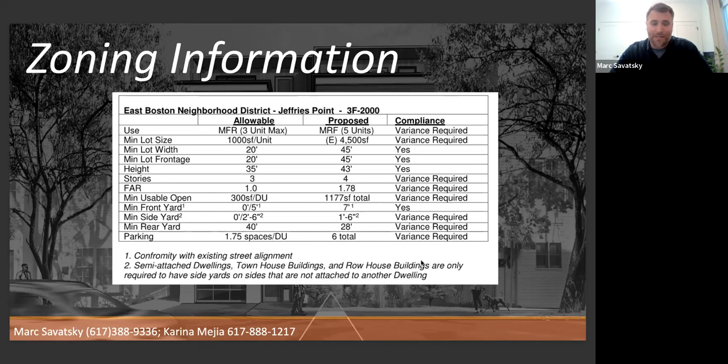Next slide, please. I'll walk you through the orientation of the building, the design. I think really highly of Chris and Zephyr. I think they put together a really nice, detailed building that flows, that works. There's a lot of small things here that I'll try to point out if I can use view options and annotate.

It was very astutely pointed out to us on our last O&S meeting. We flipped the driveway because our civil engineer suggested it may make for a slightly easier grading plan, given the way the contours of the site exist. It's not a big deal. After we learned of the fire hydrant and studied this with our transportation engineers as far as its impact on parking, we said forget about it. We flipped the driveway back to where you were accustomed to seeing it. We're going to keep the curb cut exactly where it is, so the parking on street as it currently is will be how the parking remains once this building is complete. There will be no impact, and we appreciate that comment and hear you loud and clear on that.

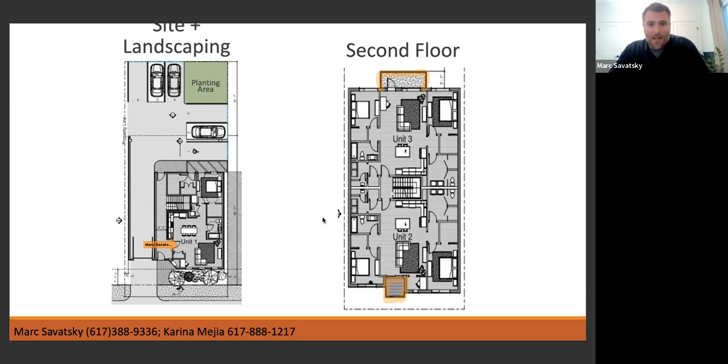As we get to Units 4 and 5, you'll notice these are duplex levels, bi-level condominiums, which I'll pause and emphasize. These are for home ownership. These will be condominiums and not apartments.

As for sale product, there's a few things the development group has taken into consideration. One is a professional management group. I think when you have a 2-unit or 3-unit building, you can self-manage, but at 5 units you start to get a lot of 'I'm not doing it if he didn't do it, and he never took the trash in, so I'm not going to do it.' For that reason, we work with a group called Urban Management, and they'll be responsible for janitorial services, taking the trash out and pulling it back in, snow removal in the winter, and upkeep of the planting areas in the front and back.

Going back to the unit floor plans, there's open concept living, dining, and kitchen on this 3rd floor. There is 1 bedroom on this level, which we think may be used as a home office. These are nice because they offer 3 bedrooms as you go up to that reduced step-back 4th story.

You get 2 additional bedrooms there, and our hope is that they're suitable for families and folks who may want to stay in the neighborhood more long-term. That's something we also know is important, so we're happy to offer these 3-bed units. Highlighted here is that outdoor space with the glass railing, which you'll see shortly. Off the rear is another deck for Unit 5, given that there's no longer a roof deck.

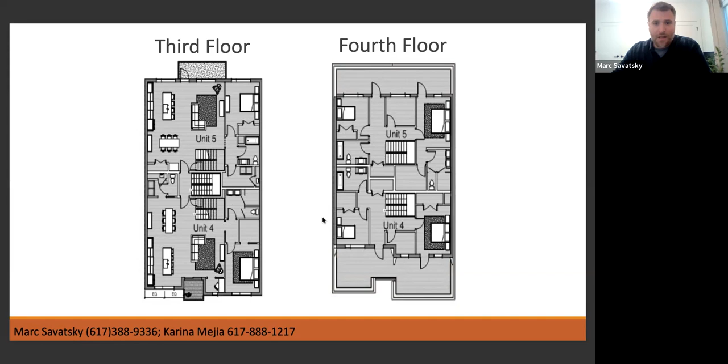Solar study. This study to the right here was done by Zephyr, and I appreciate the detail and thoroughness of these studies, though I don't always follow them precisely. This is a $10 app I use from my iPhone, which I really use every time I look at a property. I think it tells the story nicely of where the sun starts at 7 a.m. and where it wraps around at sunset at 6 p.m., giving an idea of where a building may or may not cast shadows.

Looking at this in more detailed fashion, I think what's really important to note is that this building has very de minimis impact on shadows to our adjacent structures to the left or right, especially after 10 a.m. There's a very marginal reduction in those early morning hours, but as the sun moves on, the impact on shadows is again fairly negligible.

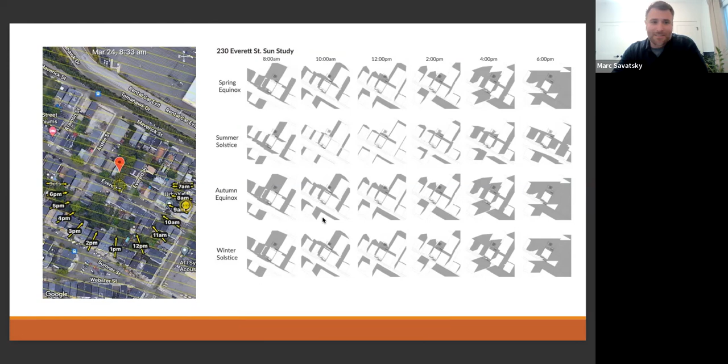This is our first rendering—this is an updated rendering, rather. I'll point out again, the curb cut has been mirrored, so the driveway would be on the right in this photo.

I think it's important to point out the materiality and the quality of the design here. What we've seen a lot of is fairly uninspired designs, and I know beauty is in the eye of the beholder—some may not appreciate the more transitional nature of this design, but I happen to think it's handsome. We use a Cembrit panel instead of your typical Hardie plank planks, so these offer a little bit of additional detail.

We introduced this product, would be a Nichiha. It's there to resemble cedar, perhaps a little more durable, and that theme carries through cohesively up to the penthouse. We introduced brick at the ground level because we think that's a very strong base or anchor to the building—a resilient and durable base, especially in an area we're trying to build with an eye toward the future and flood considerations.

There's no basement in this building—that may not have been explicit, but it's obvious from our floor plans. We're working hard to hold everything above the base flood elevation in this area. All of our critical infrastructure, heat pumps, electrical panels, all that gear, would be elevated off the street and centrally located on the roof, so it's not visible and not prone to future climate change concerns.

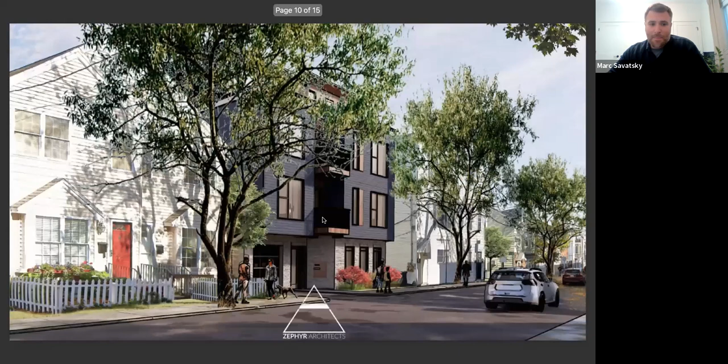This next rendering gives some context of the building on the block. One thing I've pointed out before is the eclectic nature of the houses up and down Everett Street. There's a strong argument a building on Webster Street might want to be brick, like the many brick bow front buildings there. Whereas here we have gable roofs, flat roofs, some more tenement-style old three families—there isn't one cohesive singular architectural style. Joy Street Design did a cool, more modern building about six houses down, so we think this will be a great addition to the block and neighborhood.

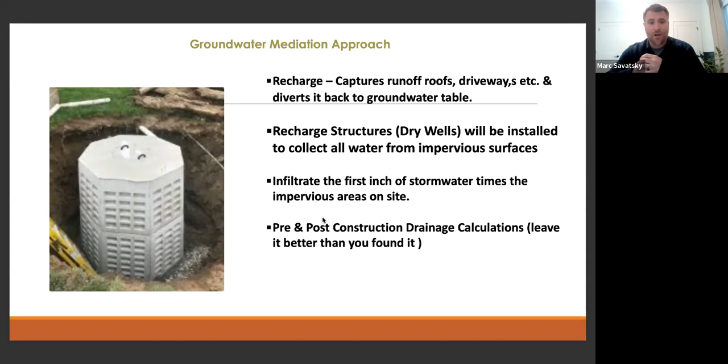Our final grading is like a soup bowl, in a less dramatic fashion. The idea is that water hits our site and doesn't run onto any adjacent sites—it comes back and falls into three catch basins located in that rear parking area, and all those catch basins go to the groundwater recharge infiltration system. Next slide, please.

Construction management plan—I won't spend a lot of time here, but the idea is that building in the city is a big responsibility. There's a lot of people, a lot of stuff going on, and we take that responsibility seriously.

Communication is something this group is committed to—I've spoken to a lot of neighbors about it. We've talked about a Facebook group, a way to let neighbors know if, say, there's a concrete placement on a Tuesday, so they're aware a pump truck may be setting up at 8 a.m. that day. If anyone has other ideas for community outreach and that type of communication, we're open to suggestions. Next slide, please.

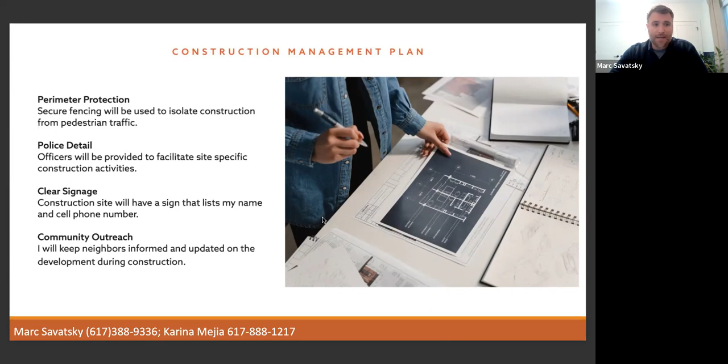I'm not going to avow that we're perfect, but we do try. For rodent control, we work with a professional group called Waltham Services, who will set up bait stations approximately 6 weeks prior to construction, prior to demolition. They'll check on those on a bi-weekly basis and refill the baits and make sure they haven't been destroyed, lost, etc. Next slide, please.

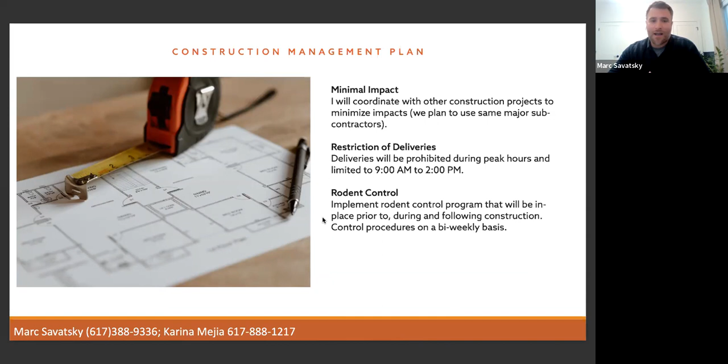Sustainability goals—I'm happy to go into this further. It's somewhat technical, but Stretch Energy Code mandates that we perform a certain degree better than the base building code, so we're committed to that. I think the stormwater drainage, which we talked about earlier, is another feature of this site. I like to say we're kind of like the Boy Scouts of America—we want to leave this better than we found it.

Next slide, please. That sort of concludes the presentation. I appreciate everybody's time and attention, and we're happy to take any feedback or answer any questions.

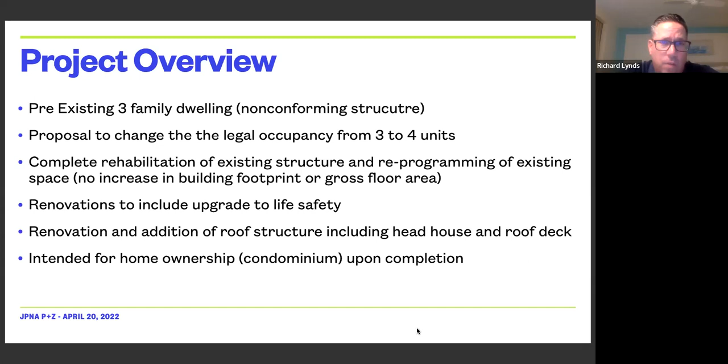So our zoning district, 3F2000, is the designation that the Boston Planning and Development Agency and the Zoning Commission put forth back in 1993. As everybody knows, we're going through Plan East Boston, which will be a rezoning of the entire neighborhood. I'm not sure what the rezoning will look like for this particular neighborhood, but one of the reasons I include this is because we have an illustration.

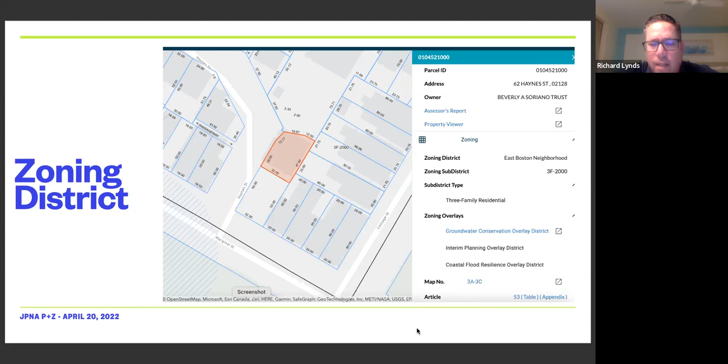If you see those blue hash lines closer to the bottom of the screen, that's the flood zone. Although we're not currently in the flood zone, we're relatively close, and that's one of the reasons why we're proposing these changes. They all pretty much deal with the existing floor space, not any additional space. We're not proposing any additional space in the basement.

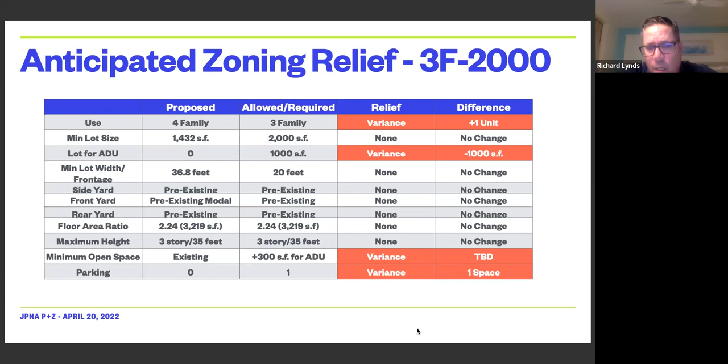Our parking, currently there is no parking associated with the building, and therefore there is no parking requirement for the existing 3-family. The zoning code says that you're only required to add 1 parking space for the additional unit you're proposing, and therefore we'd request the variance for the 1 space. Next slide, please.

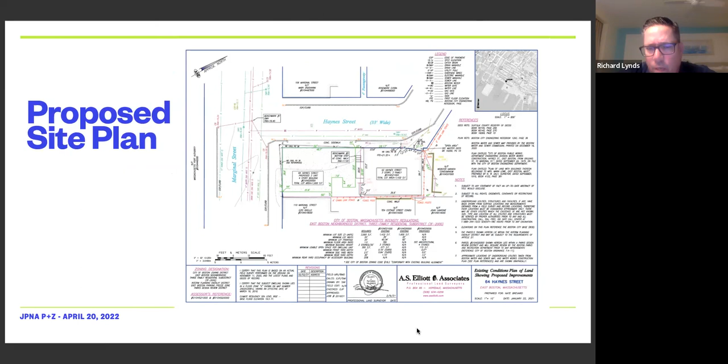Just our site plan, we can come back to that for reference, but just showing you the existing conditions and the setbacks that exist in the building currently.

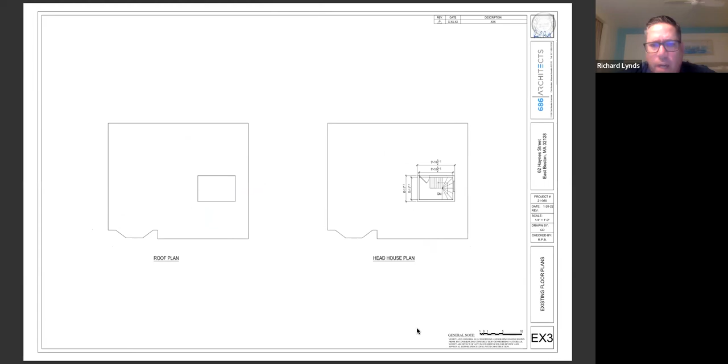Next slide. And the existing head house as shown in the illustration, just showing the location of the head house. Next slide. Existing elevations showing the height up to the top of the existing head house. Next slide. And just a different view from the other angles. Next slide.

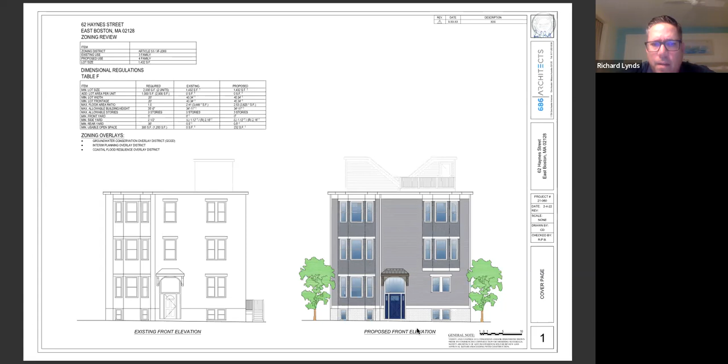So showing our basement plan, we're not adding, as I said, no livable space in the lower level. That's the current condition now. That will be strictly for storage and mechanical equipment.

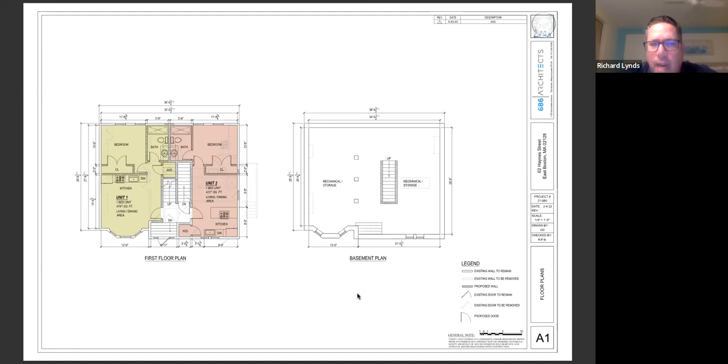When you get up to the first level, we are proposing these as, we're calling them 1-bedrooms. They're technically 2 studios at the first level. And the reason we're proposing studios in this particular case, it does create an affordable option. When we are proposing condominiums, everything that does go on the market is based on square footage. These are relatively smaller units. And based upon that, these would be at a likely more affordable price point than something that's in the 800-900 square foot range. Next slide, please.

As we go up to the second level, we're actually making both unit 3 and unit 4 bi-level. You would enter on the second level, have an internal stairwell up to the third level, and those would be 2-level units each, mirroring each other left and right. As said previously, we have a much larger bedroom count in the building currently.

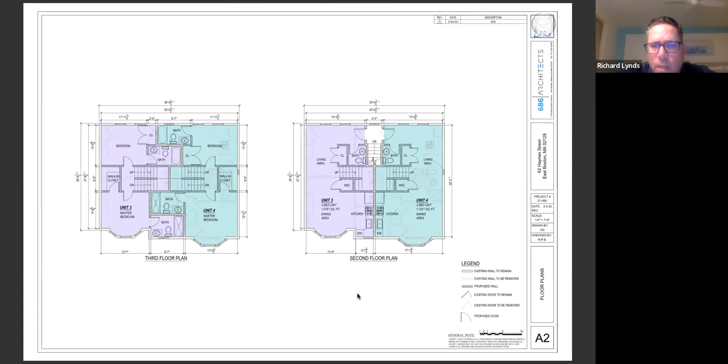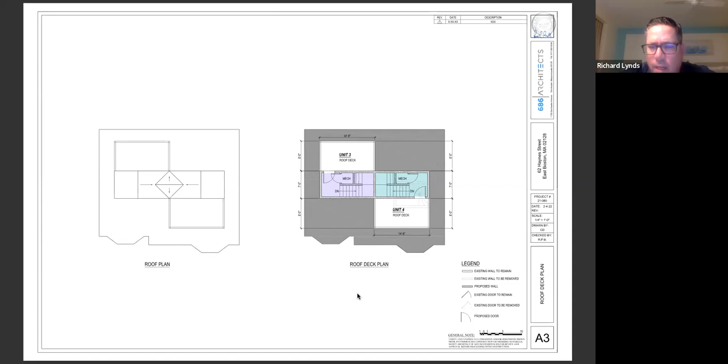That would be reduced down to 6 bedrooms. Next slide, please. Just showing our layouts for our roof deck. We see the existing head house location on the left side, and our proposed on the right side. We would continue to still have 2 roof decks on the roof—one accessed via hatch, and the other via the head house.

So we are presenting tonight—this is our initial presentation. We anticipate an abutters meeting at some time in the very near future. I anticipate we'll see a planning and zoning follow-up, then proceed hopefully to a JPNA voting meeting at some point in the future. My guess is we'll be before the Board of Appeals sometime this summer. Assuming we get approval, the permit would issue probably by the fall with design review, and construction would take about 6 months to complete.

I believe that's the last slide. Yep, perfect. So happy to answer any questions or address any comments.